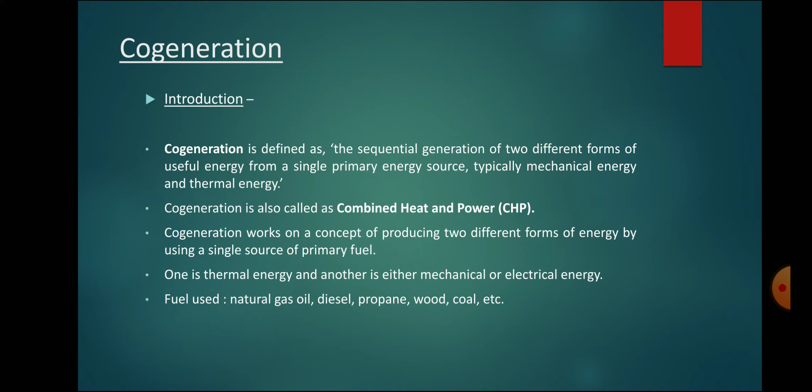As the name indicates, cogeneration works on the concept of producing two different forms of energy by using one single source of primary fuel. The fuel may be different. It may be oil, diesel, propane, anything. Of these two forms, one is heat or thermal energy, and the other one is either electrical or mechanical energy. The fuel used may be natural gas, oil, diesel, propane, wood, coal, etc.

Working principle of cogeneration. Combustion of a fuel releases high temperature heat which is used to generate electricity with the help of a steam turbine, steam engine, gas turbine or diesel engine, etc. During generation of electricity, a major portion of heat goes waste along with exhaust gases. This waste heat is recovered and used to boil water, produce steam, or for space heating or process heat needed for various domestic and industrial applications. Thus, two forms of energy are generated, which are electricity and process heat.

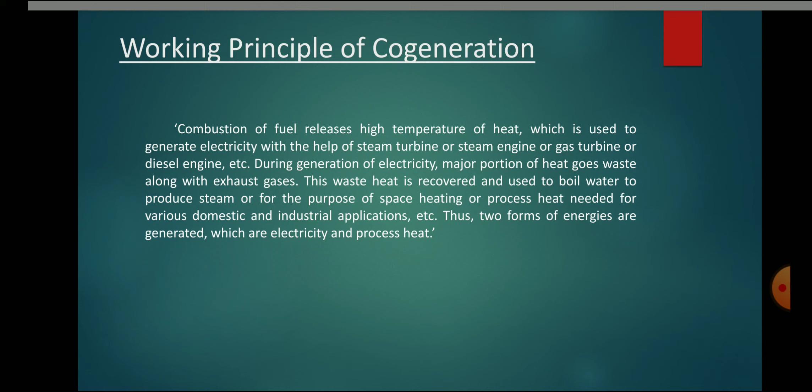Advantages of cogeneration. There are different advantages of cogeneration, which is used for industrial as well as domestic applications. First, cogeneration helps to improve the efficiency of the plant. Second, lower emissions to the environment, particularly carbon dioxide, CO2, the main greenhouse gas. Greenhouse gas is very harmful if it is released in the atmosphere without any filtering or changes. It is particularly carbon dioxide, but other gases are also included. CO2 has the highest concentration in it.

Number three, cogeneration reduces cost of production and improves productivity. Number four, cogeneration is more economical compared to a conventional power plant. Number five, cogeneration helps to conserve water as well as the cost of water. Cogeneration has increased employment opportunities. A number of studies have concluded that the development of CHP systems is a generator of jobs, a very vast field where the opportunities are more.

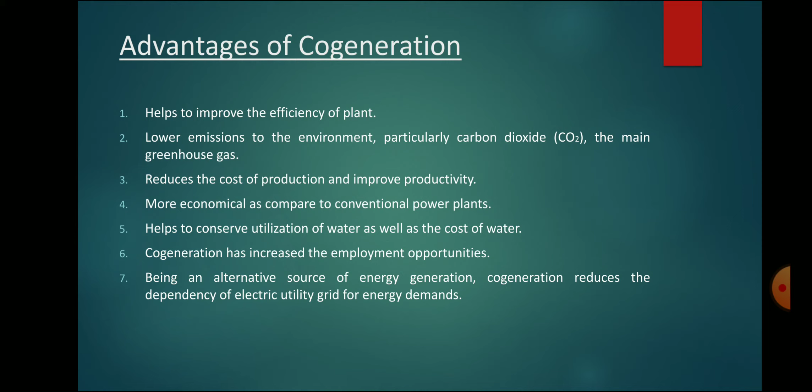Now we will see the disadvantages of cogeneration. Obviously it has many advantages, so there are disadvantages too. First, it has a high capital cost. Second, moderate efficiency if it runs at part load instead of full load.

Why is cogeneration necessary? I made this pie chart on this PPT. You can see the energy utilization in a conventional power plant. First we are not thinking about cogeneration; we are thinking about the conventional power plant. In the conventional power plant, energy used is only 35 percent and energy wasted is 65 percent. Think what a big loss this is.

If we use a cogeneration power plant rather than a conventional one, you can see the energy wasted is only 20 percent while the energy used is 80 percent. This is the main factor, the very first point, why we can turn to the cogeneration power plant rather than the conventional power plant.

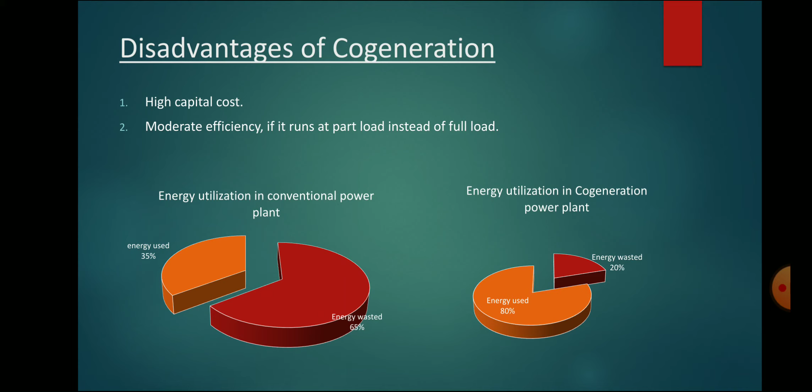The applications of the power plant. There are some applications, generally industrial applications. First, wastewater treatment. Second, military, industries, data centers. For a data center, a very low temperature is required to maintain the software and data. Next, hotels, hospitals, education establishments, horticulture, recreational and relaxation centers, and sports centers.

These are all about the cogeneration power plant. Now we will discuss about the trigeneration plant. Trigeneration is defined as the simultaneous process of cooling, heating and power generation from only one fuel input.

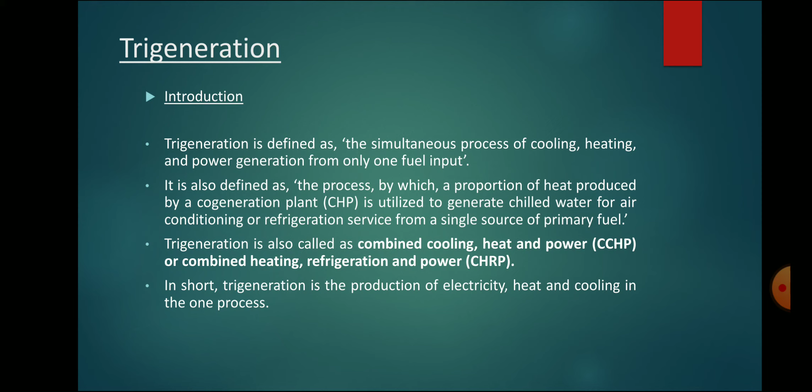Trigeneration can also be defined as the process by which a proportion of heat produced by a cogeneration plant, that is CHP, is utilized to generate chilled water for air conditioning or refrigeration service from a single source of primary fuel. Next, trigeneration is also called combined cooling, heat and power, CCHP, or combined heating, refrigeration and power, CHRP. In short, trigeneration is the production of electricity, heat and cooling in one process simultaneously.

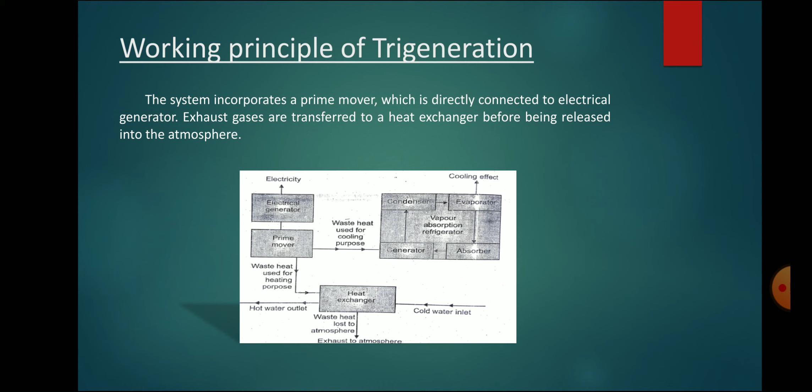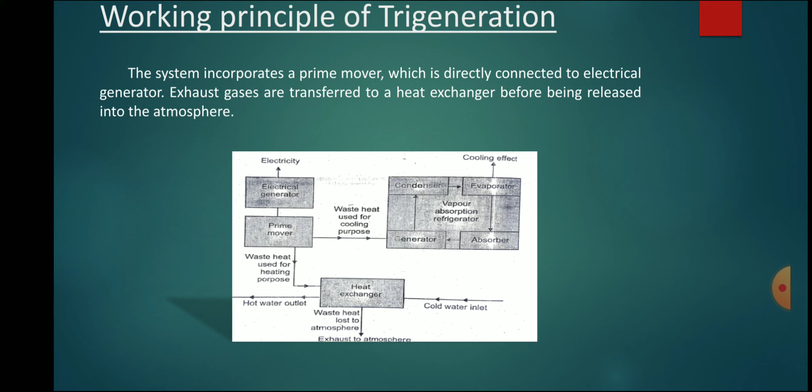Working principle of trigeneration. It states that the system incorporates a prime mover which is directly connected to an electrical generator. Exhaust gases are transferred to a heat exchanger before being released into the atmosphere. So here is a very basic diagram of a trigeneration power plant. Very simple diagram. You can see the link in the description below, and it clearly defines what trigeneration is.

Advantages of trigeneration. As with cogeneration, there are some advantages of trigeneration. First one is low payback period. Recent audits of trigeneration potential in India identified the payback period on trigeneration integration in industrial applications to be as little as 2 to 3 years. So payback period is the very first advantage. Number two, protection against electricity cost and outages.

As a relatively independent energy source, a trigeneration system can provide a reliable level of backup power, especially in critical applications such as hospitals, process industries, etc. So this point of advantage states that it is backup power. Just as we back up some apps, data, photos or files on our mobile phones or laptops, it's like that.

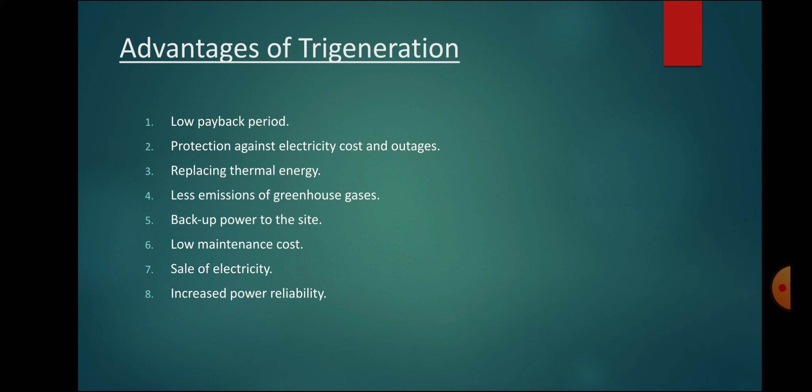Next, sale of electricity. After fulfilling electricity needs for the site, excess electricity can be sold to the local electric utility grid. Next is increased power reliability. So, some disadvantages of trigeneration here. First one is high capital cost. Obviously, it is a very useful backup source, so obviously the capital cost will be high.

Next, more research work is needed. Third, intense planning is required for designing trigeneration systems for projects. Next, applicability differs with each project; therefore, detailed feasibility studies are required for each new project.